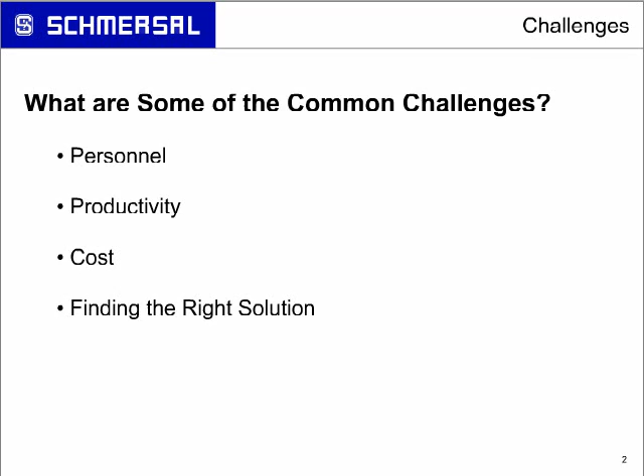So the very first one we're going to look at is the personnel factor. What we did here is we put some of the most common quotes you tend to see and the categories they really fall under. The defensive walls are put up, and what we mean by that is human nature definitely kicks in with everything that we do. And the same thing occurs when we talk machine safeguarding.

Automatically, when you start looking at a machine and you're going to make changes, modifications, or retrofits, the operator or maintenance envisions that you're going to make their job harder. And the defensive walls do get put up. They put up blocks. They come up with reasons why the machine shouldn't or could not be properly safeguarded. So when you look at some of the most common arguments, and I'm sure everybody's heard some of these at some point in their career when talking machine safety, the first one: it'll never happen to me.

No matter how you look at it, nobody ever wants to see anybody get hurt. But the whole "it'll never happen to me" syndrome becomes a problem, because the fact that it never has happened to them doesn't mean it will never happen to them. Just because they know it and maybe they feel that they're protected, the goal is to protect them as well as other people that may work on that equipment.

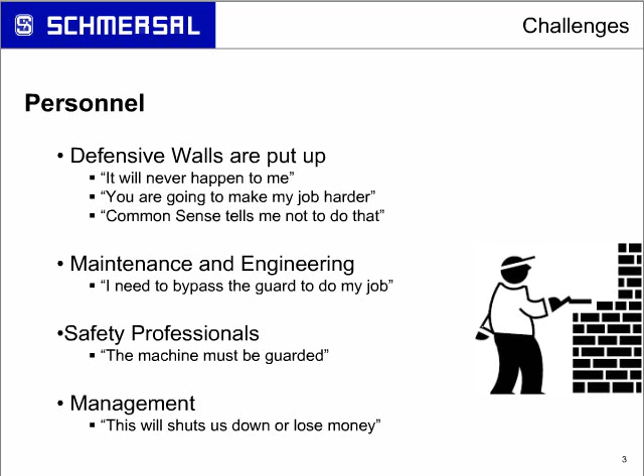The next one we're going to look at is the productivity aspect. The two most common ones: the machine's going to run slower due to the steps needed, or I cannot work with the machine in the same way because you put these guards up in my way now. One of the best things you can ever do to understand what they're talking about and why these statements are being made is understand what's going on with the machine itself. Why is the machine going to run slower? Why is this going to be in the operator's way?

When you start really drilling down versus just making bold statements that it must be guarded, and this is the feedback that you're getting of why it can't be guarded, you have to look at the function of the machine. It's easy to say something has to be guarded, but if you're not understanding the function and what the machine was supposed to do, was it designed to do the task that it's doing? It might be the age of the machine. Maybe there is something wrong with the machine that never got reported to maintenance, or if it did, it never got fixed. It wasn't high on the priority list.

So what you're finding is operators need to have more hands-on intervention of the machine, because something as simple as a jam and opening and closing doors that have a safety switch on it that shuts the machine down gets in their way, because now they're shutting the machine down where before they were interfacing when the machine was running. Not the right thing to do, but in a case like that, you install a guard, what happens is it does impact the productivity of the machine, but it's not the safeguarding that really had the impact on the machine.

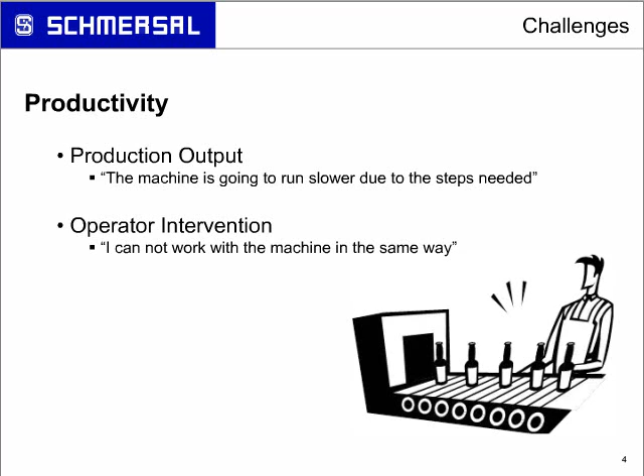Next one that always comes into it is a cost factor. Whenever you do machine upgrades on an existing machine, doing these mods are going to cost too much money. Or the safety upgrades are going to cost more than what the machine is worth. Some of the times that might be true, but you have to find out what is the truth in that and what are the guarding solutions.

Because you can have a lower cost guarding solution that's quick, cut and dry, a box with a guard door and an interlock with the circuitry behind it, and minimize the cost impact, but it might not be an effective solution, where having additional control measures or changing it from a swing door to a counterbalance door because of spacing solves an ergonomic issue, but there's a higher cost factor to that. You really have to look at each solution on an individual basis to figure out what is the right solution and what are the true cost factors associated with the guarding.

The safety upgrade costs more than the machines. You see that on sometimes the simplest machines, such as a drill press or a bandsaw. You might have paid a couple $100 out of Sears or MSC or something like that, and then when you have to put all the proper guarding on it, all the guarding costs more than the machine.

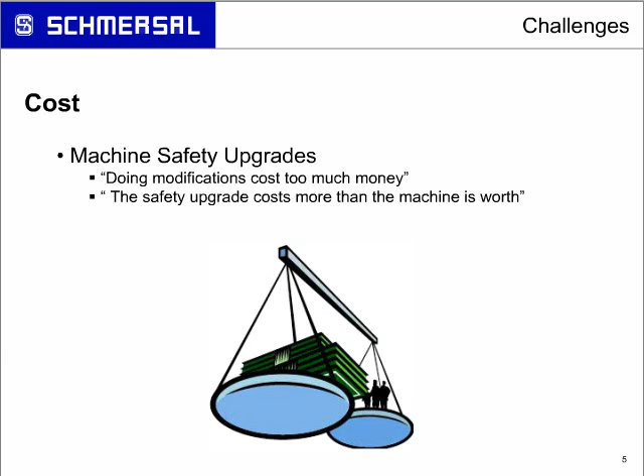The last section is finding the right solution. And some of the things you get into is the arguments that that'll never work, which kind of relates to going back to putting the defensive walls up. If somebody is stubborn in the fact that it doesn't matter what idea you come up with, that'll never work. I don't know what standards to use. I don't know what they're telling me. I see words, but how do I actually apply it to a machine?

Finding the balance. You get one person that says we can't guard the machine. You have another person that says you have to guard the machine. They're on opposite ends of the spectrum. You have to find that balance and communicate with one another. The argument that'll never work: sometimes it's because the ideas didn't come from the people that are really working with the machine. And if you force something into them, they may find every way of not allowing it to work.

But when they become part of the solution, there tends to be a vested interest in that, where they're going to help make that solution work because they understand that you're out there to try to protect them. You do not want to see them get hurt. EHS is not the enemy of production. They want to see people go home at the end of the day, be able to go home to their families without any injuries, going to the hospital, and that's what your goal is.

So getting through that argument that will never work, you got to break down the barriers. You got to start looking at it. When you start looking at the solutions, there isn't a magic bullet that one solution fits all. Every machine is going to be individual on what's being run, how it's being used. And you may not just have one solution. There might be 3, 4, 10 different solutions when it comes to machine guarding that you can effectively apply.

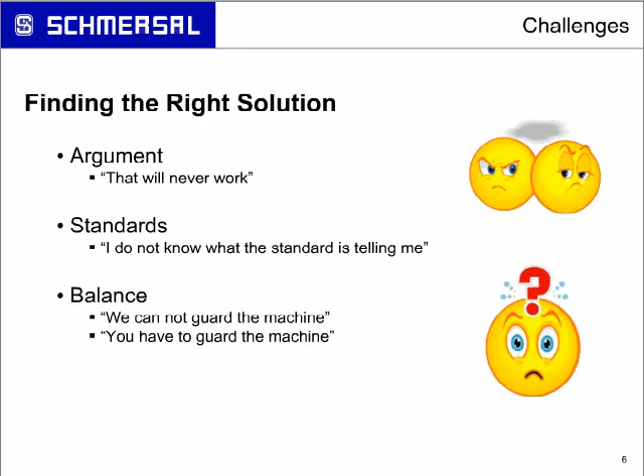If you're not communicating as a team, if you don't take those barriers down and educate each other on what's going on with the machine and what the needs and the requirements are, nothing's going to be able to move forward effectively for you. You can force solutions down people's throats. It's going to create animosity, and you got to get over that hurdle. You got to get people on the same page. You got to get them talking the same language.

Again, you're working as a team. You want to understand how the machine operates on all parties. What needs to be done on that machine? What is the function? What are some of the problems that you're experiencing that you can take into account on what the needs are? It's not just the operators that we mentioned.

It's maintenance. Maintenance, it might be an older machine. Well, there might be lubrication points on that machine that maintenance has to gain access to. But hey, great, you guarded the machine, you protected the operator, but you just made maintenance's job a whole lot harder because you guarded all the Zerk fittings on the machine to keep them from effectively performing PMs on the equipment.

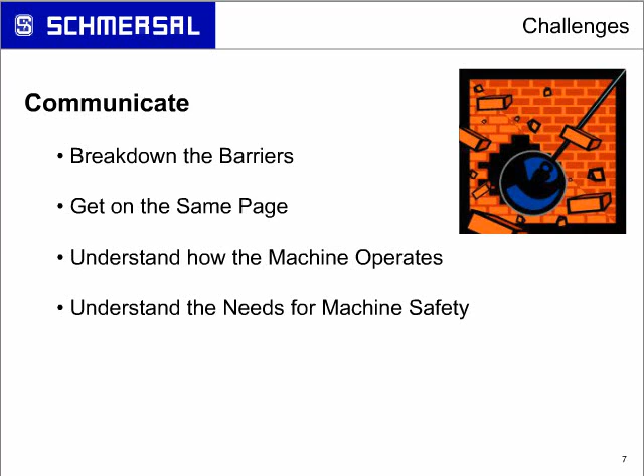So it's looking at everybody involved and understanding how the machine operates and what are the needs for that machine and the safety of that machine. But safety is not just covering the hazards. It's looking at the operation and coming up with a good solution that'll work for everybody. Once you have that, you can now put the pieces together. You can start working with EHS, production, maintenance, engineering, whether it's using third-party integrators or you have your own internal resources to do it. You can now start putting the pieces together and coming up with a game plan and coming up with good solutions and designs for machine safeguarding.

So everything we've talked about in the last half hour really has to deal with getting on the same page and communicating. If you can do that, you're over the biggest hurdle when it comes to machine safeguarding, because now everybody understands, everybody's on the same page, everybody knows what the goals are and how to actually achieve those goals to come up with a good working solution. When you come up with a good working solution, the machine is running well, the safeguarding is effective, and you go for your goal of achieving a safe work environment and protecting people from serious harm. That's what we want to do at the end of the day.

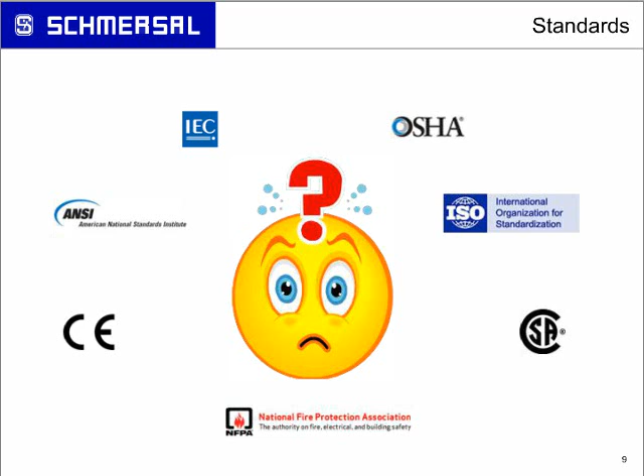Now that you've got that communication factor going, the next thing comes to the standards. We start seeing all these standards out there. We have OSHA regulations. We have ISO standards. We have NFPA, ANSI. Sometimes all these different standards can get very confusing. Which ones do I need to go with? What are my guides? Where do I go to figure out what I need to do? Hopefully we can simplify that a little for you and break it down.

The first thing when it comes to priorities is the governing bodies, whether it's the Ministry of Labor up in Ontario or OSHA in the U.S. You got more of the CE directives over in Europe. But if I simplify it, just talking about OSHA, for example, as it relates to machine guarding, there are specific OSHA standards, 29 CFR 1910.212 for machine guarding. OSHA is our governing body in the United States. You have that in other countries around the world. The governing bodies are the priority. So your first point is going to your governing body, in this case, in the U.S., being OSHA.

There are some specific OSHA standards related to machinery. It could be 1910.147 for the control of hazardous energy, which is lockout, tagout principles and practices and procedures. 1910.212 has to deal with general requirements for machines. Unfortunately, what happens is they're a governing body, but some of those standards are very generic, and it's hard because they're so generic that what do we do? How do we read those, interpret them? Where do we go from there?

Well, once you implement what you can on the OSHA guidelines, the next is the voluntary industry consensus standards, because a lot of these standards are not incorporated by reference into law by the governing bodies, but the governing bodies will also refer you back to industry consensus standards, letting you know that they won't override an existing governing body standard, but they can be used in conjunction with these standards to improve the overall safety of the machine.

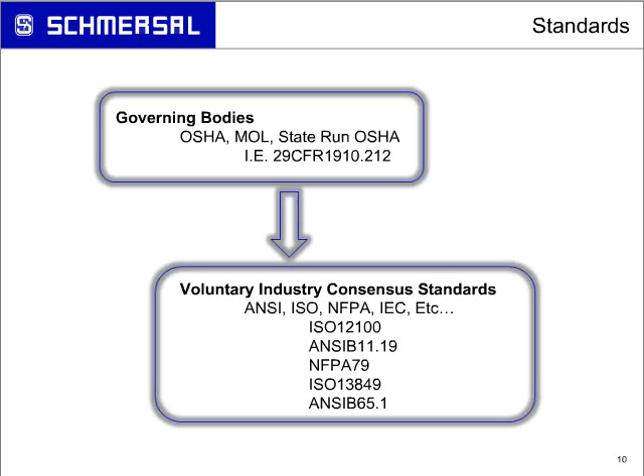Type B is specific to a group, and they're broken into two types, B1 and B2, where B1 is particular aspects to a machine, or B2 being aspects to safeguarding materials such as interlock switches or light curtains. They're specific to a type of device.

Examples of B1 type of standards would be ISO 13849 for performance levels. It's not specific to a machine, but it's specific to a group because it's performance level for the safety-related part of a control system. NFPA 79 is a type B standard. It's specific to industrial controls, not the entire machine. It applies to all machines, but it's industrial controls, and that's a type B standard. A B2 would be ISO 13850, the construction of an emergency stop, for example. That would be a B2 type of standard.

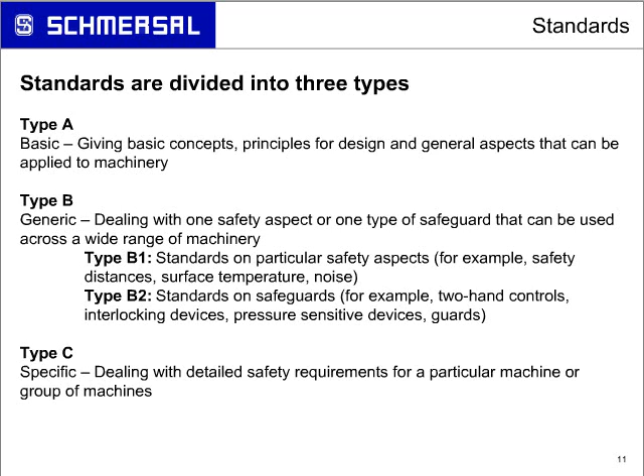When we look at priorities, the priorities on equipment would be type C takes precedence over type B or type A. And it sounds a little reverse because you think A, B, C, A comes first. C always comes first. It takes priority, and then it's backfilled in by the B or A standard. So if you don't have a specific machine standard, such as the robotics industry, you will fall back on the general principles of machine guarding, ISO 14120 for machine guards, construction and design of separating type of guarding, or safety distances, ISO 13855 for calculating safety distance when using presence sensing devices.

But when we come back to our core of our governing body, here's an example of OSHA. Many governing bodies have general duty clauses. So when you see the general duty clause in OSHA, there are responsibilities on the employer and there are responsibilities on the employee. Bottom line is each employer shall furnish a place of employment which is free from recognized hazards that can cause death or serious injury. It's basically saying that if there's something there that can seriously hurt somebody, you need to protect your people from getting serious harm.

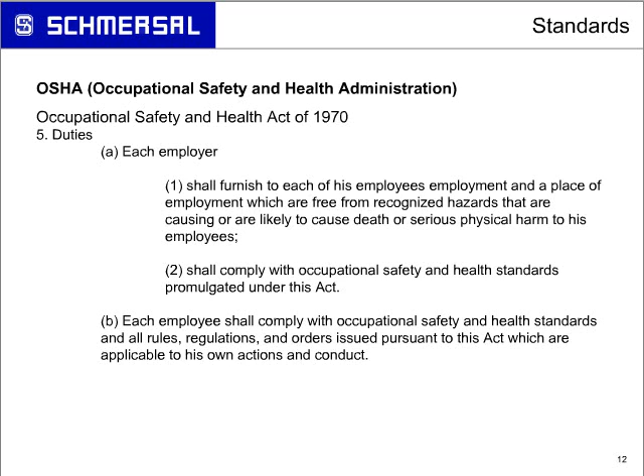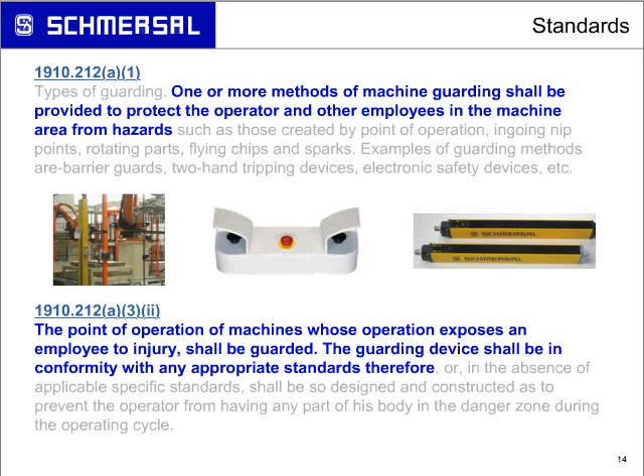Now with that, I'm going to go into a couple different types of standards. But what you're going to see is some similarities. So regardless of the standards that you use, you're going to find a lot of similarities in exchange of ideas, thoughts, and information from one standard to another. If you're in the U.S., ANSI is one of our, I shouldn't say regulating, I apologize, our industry consensus type of groups that form very good machine safeguarding standards.

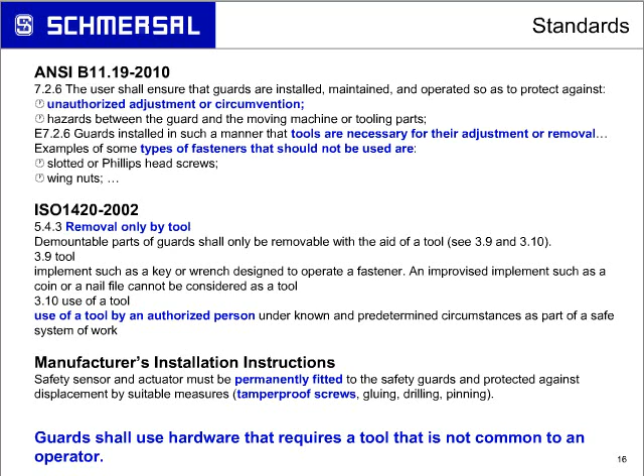The next one that we tend to see is the use of machine safeguarding with interlock switches or a light curtain. So reclosing a guard must not allow the machine to automatically restart. Well, why not? I can close the door. Why can't it automatically restart? Here again, I bring you three different standards, B11.19, NFPA 79, and European EN 60204. Where does it say that?

So if we highlight those sections, it's pretty clear when you dig into the actual words: reclosing the interlock guard shall not, in and of itself, cause a hazardous situation. NFPA 79: shall not initiate machine motion or operation that results in a hazardous condition. European: the reclosing or resetting of an interlock safeguard shall not initiate hazardous machine operations. Here we are with three different standards, but they're basically all saying the same thing.

Sometimes it's a little hard reading the words when you're looking at a larger paragraph, but if you drill down and take small bits, you'll see some of the commonality and how you would really apply it to machine equipment.

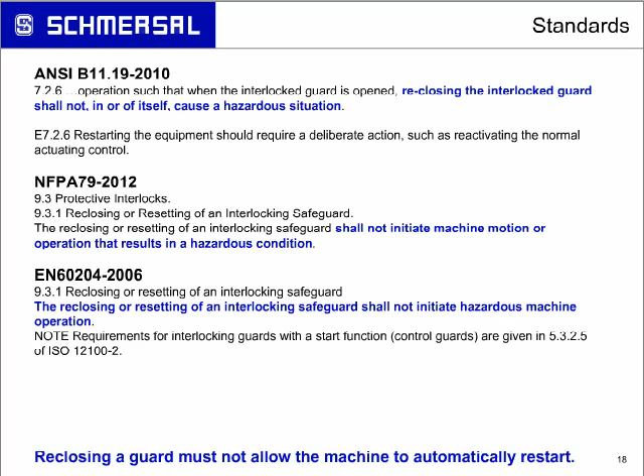If we look at things such as risk assessment, I've seen cases where people start throwing guards on machines because they know they have hazards, but how do you do that without actually doing a risk analysis? And sometimes, well, why do I need to do a risk analysis? I see that the machine can bite me. Well, you really need to know what the hazards are, and you've got to document it. You need to document what you're doing, why you're doing it, how you're doing it.

So when you look at some of these standards and you see where it's highlighted: the robotic standards, doing a hazard analysis, a risk assessment; ISO 12100, risk assessment and risk reduction; B11.19, risk assessments; 13849, risk reduction. It's all going through that analysis stage and figuring out what you need to do and how you need to do it.

The thing you're going to look at is looking at the different standards and seeing that commonality and the statement we have on the bottom. How do you design an effective guarding solution without the risk analysis? Do you know all the hazard points are on the machine? Do you know what access points are needed? How do you do that without doing a full risk analysis versus just throwing a solution in there that may

or may not work? Identify what it is, document it, and when you do your risk analysis and you do your implementation, then you can document what you did, why you did it, how you did it. That way, if anything ever comes up as far as questions, you have that documentation backing you up on what you did, why, and how.

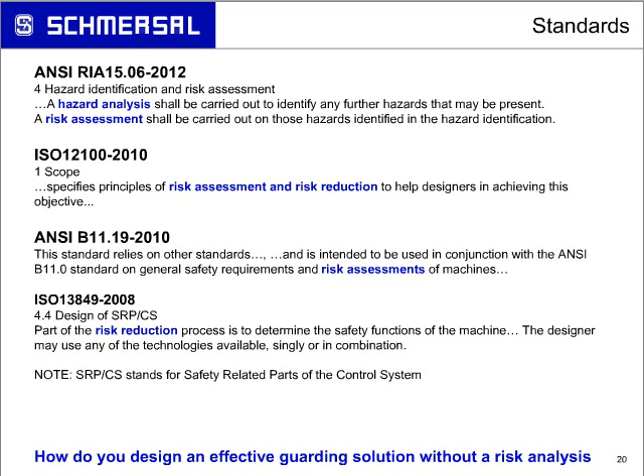What this is all telling you is looking at the controls, what is the hazard, what is the level required, because what happens behind the scenes is completely invisible to the operator. What safety controllers do you need in there? What is the wiring? What are the pneumatic safety devices that you need to make sure that your machine still shuts down and prevents it from restarting so you don't get into a serious hazard condition?